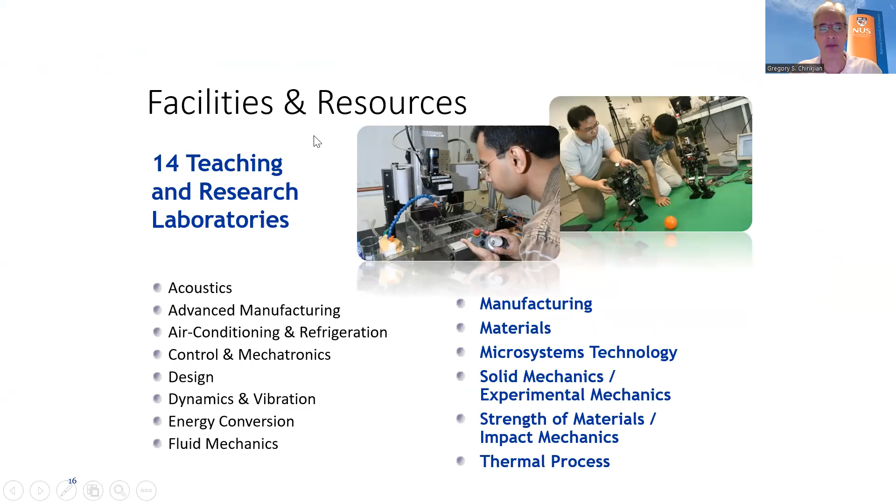Now going back to older work. As Yancy mentioned, I did my PhD at Caltech, finishing in 1992 with Joel Burdick. My topic was what we call hyper-redundant manipulators.

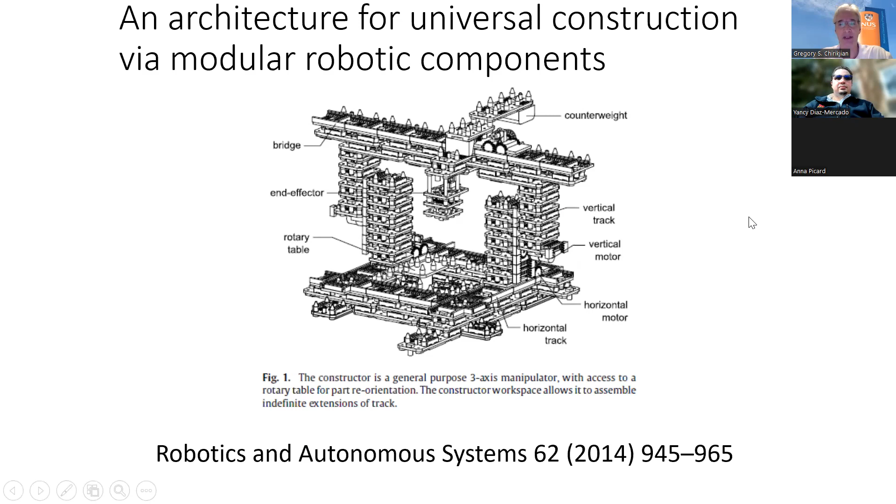Here's a video showing this in action. The idea is if you have a stack of these blocks, this gantry-like robot can go pick and place, and put the parts together. You can actually see it's bolting them into place.

The end effector has a screw fixture which screws onto a part. Each part has screw threads on it. It screws on, picks it up, moves it over, unscrews, and bolts it down. So it's more than just Lego blocks—the structure is bolted together.

You can see that it's forming a second gantry. The first one is moving in one direction, and the replica would move in the other direction. This led to some work on characterizing self-replicating robotic systems.

We came up with a concept called the degree of self-replication. If one is stacking 4 blocks, that is 1 degree of self-replication. If a robot is building a copy of itself out of hundreds of blocks, that's a higher degree of self-replication.

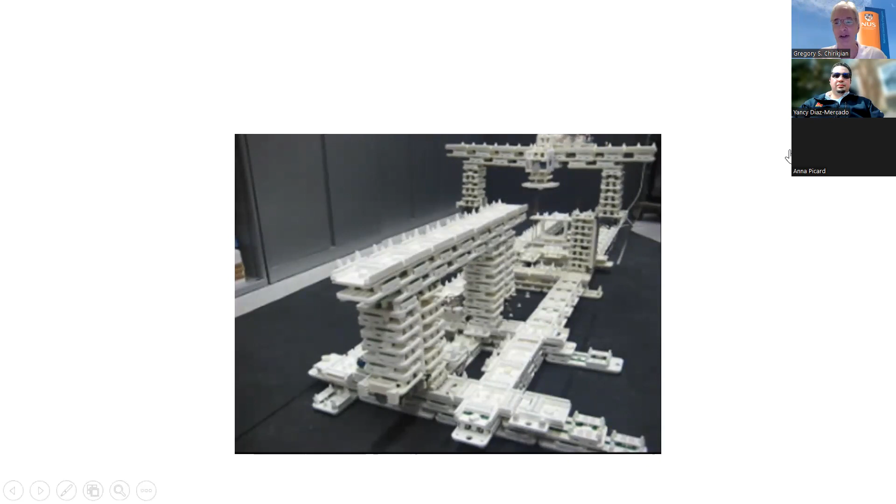So why should anybody care about robotic systems that can build other robotic systems? Well, this concept actually goes back before my time—I was in high school in 1980. The Freitas report from NASA, by Robert Freitas, proposed that on the lunar surface one could develop a self-replicating factory that used in situ resources, reducing the need for launches and building up capacity from a small factory.

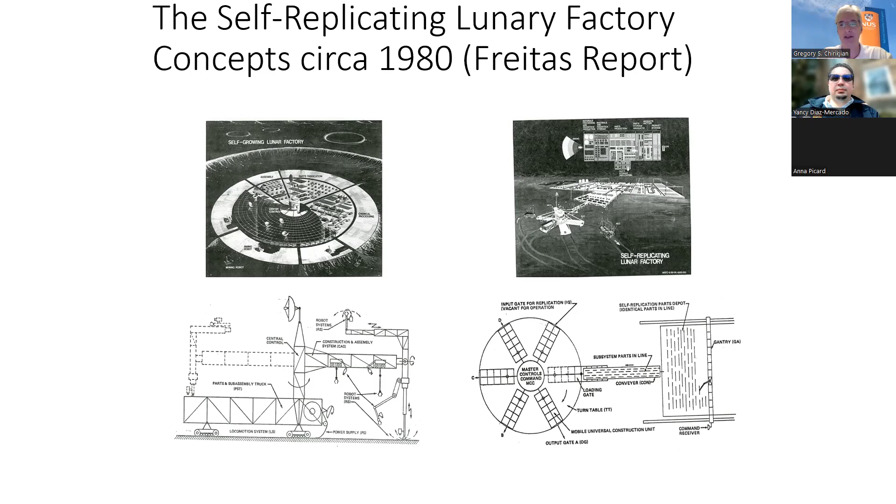At the core of such a small factory would be robots. That report didn't have a lot of technical detail about how the robots could replicate. So about 20 years ago we got into the act and developed what we call an architecture for self-replicating lunar robots, together with Matt, my former student—and actually all these names are my former students—Yu Zhou and Jackrit Suthakorn.

We had this more recent review on robotic self-replication. Not too different from self-replication is the area of team diagnosis and repair. Suppose you have a team or swarm of robots and one of them breaks down. How can the other robots diagnose that and repair the broken robot?

The idea is that each robot in the team is itself modular, and each robot does a little dance every so often while the other robots watch. They formulate, in a Bayesian sense, a hypothesis about the state of the robot. So if the robot's dance is to do a figure 8, there's some variation of what a normal figure 8 maneuver looks like. That's a statistical statement, probability distributions in the pose of the robot evolving in time. If that probability distribution has low variance around the figure 8 pattern, it might be diagnosed as healthy. If it varies widely, characterizing that fault state is what this was all about.

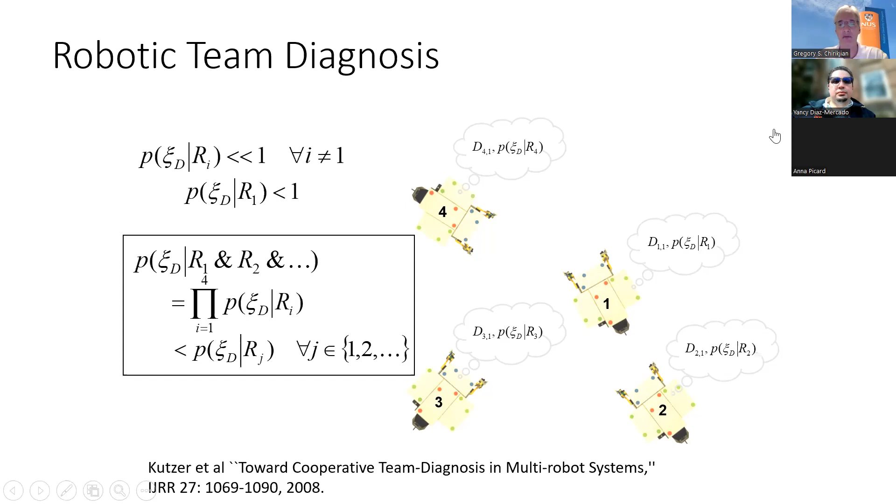Behind a lot of what I've been doing over the last 20 years is a certain kind of mathematics, which electrical engineers should be even more comfortable with than mechanical engineers, in that the idea here is it's a generalization of Fourier analysis. So whether it's image or speech processing or whatnot, Fourier-based methods, FFT, convolution theorem are ubiquitous.

It turns out that the concept of convolution extends not only from translation of a mask, say, for template matching, but if you have a function on a group, such as the group of rigid body motions, or two functions, you can convolve them together. So there's a natural definition of convolution of functions on Lie groups, including SE3, the special Euclidean group of rigid body displacements that we often use in robotics.

There's a concept of convolution, there's a concept of Fourier transform, which takes such convolutions and makes them into a product. In the Lie group setting, if you have a probability distribution, such as in the self-diagnosis work I mentioned, you can define a mean and a covariance and look at how the mean propagates under convolution and how the covariance propagates under convolution. I've used these tools quite extensively, not only in robotics, but in other fields.

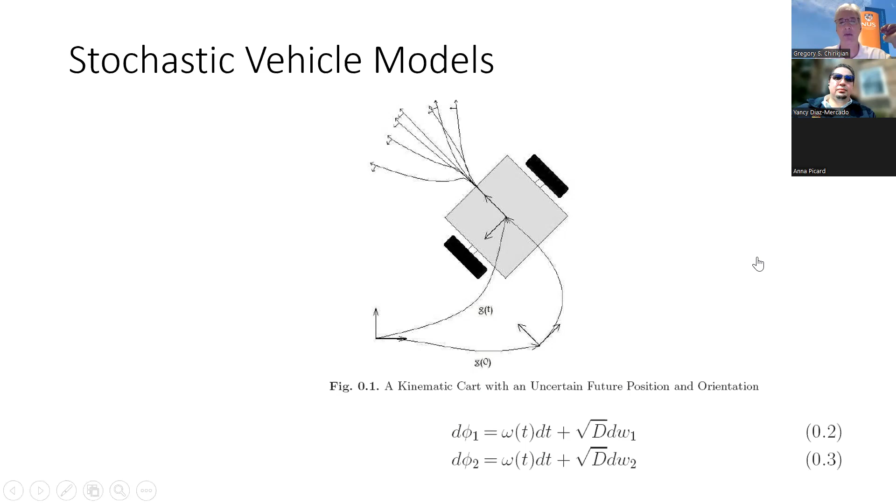I'll give you another example in robotics where these things show up. The Kinematic Cart, the wheelchair-like robot with two independently driven wheels, if you tell it to go straight forward—in other words, you have the wheel velocities both be constant—you'd expect it to go straight forward. But once you add Gaussian white noise to each of the wheel velocities, which could be a model for jitter in the motors or slippage of the wheels, then the trajectories will splay out like in the picture shown here. So we developed a stochastic kinematic model for this kind of cart.

What results, in terms of where the position of the cart is after some period of time, is something called the banana distribution—I didn't name that, it comes from the SLAM literature. On the left here, you see the blue level curves of the banana distribution. You can get that by doing many trials of a stochastic differential equation, or there's a corresponding partial differential equation, a Fokker-Planck equation, which directly propagates the probability density.

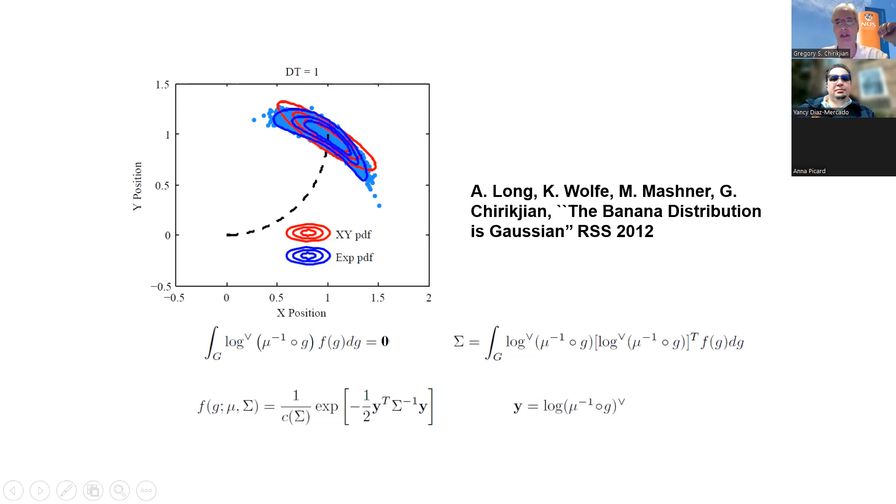So you look at that banana distribution and say, obviously it's not Gaussian because the level curves are not ellipses, but that's in XY-theta coordinates. If instead we use exponential coordinates for this Lie group—the group of rigid body motions of the plane, which describes the position and orientation of the robot—then we showed that this banana distribution is actually Gaussian, but in those exponential coordinates. That comes back to the list of mathematical equations I showed earlier, and the same mathematics applies elsewhere.

I mentioned DNA modeling before. We actually publish in the physical chemistry, biophysics literature. So instead of time being the independent variable of where the kinematic cart goes, if you have DNA subjected to Brownian motion and you capture the shape of the filaments, and if you anchor, say, the base, you get the same splaying of configurations.

Here, it's not trial runs of stochastic differential equations evolving in time, but rather you can think of it as like a bouquet of configurations of DNA. It's actually exactly the same equations as the kinematic cart. For DNA it's in 3D, as it is for kinematic needle steering, another area I've worked in. But in this particular paper, things were 2D because the DNA got adsorbed onto a surface, and our experimental collaborator, Martin Guthold, used an AFM to trace out the DNA shape.

The application here was to determine where along the DNA filament a cisplatin, a chemotherapeutic drug, was binding, because it was the binding of that drug and the bending which inhibits the replication of the DNA, particularly in testicular cancer is where this is used.

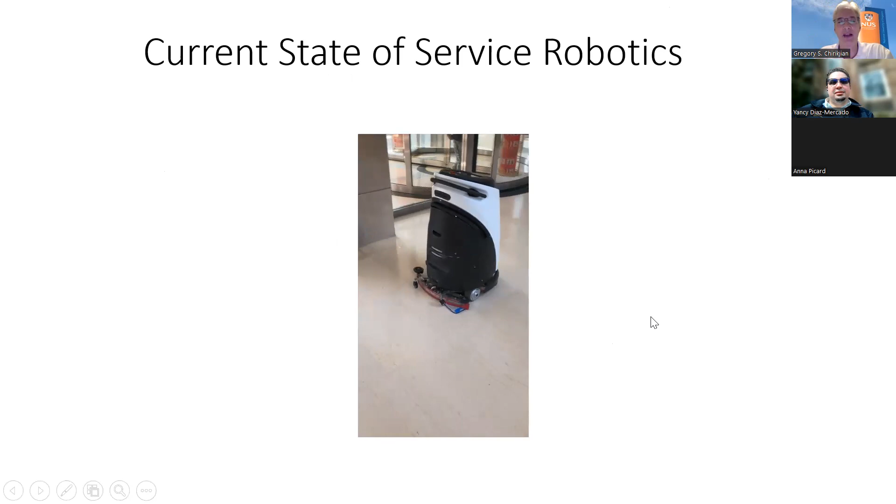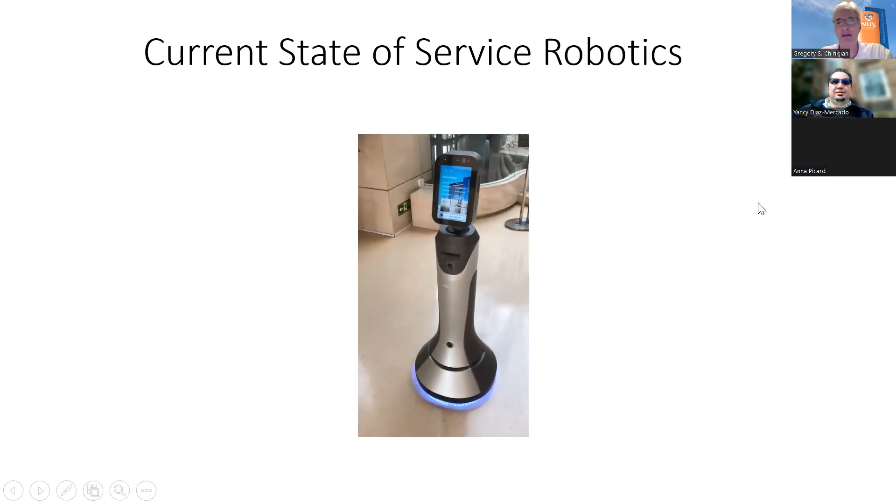So if you look, what is the current state of the art of robots in the service environment? Well, you have things like robots cleaning floors, and this is a robot greeting people at the lobby of this hotel. This happened to be a hotel in China before the pandemic, but they're not very smart.

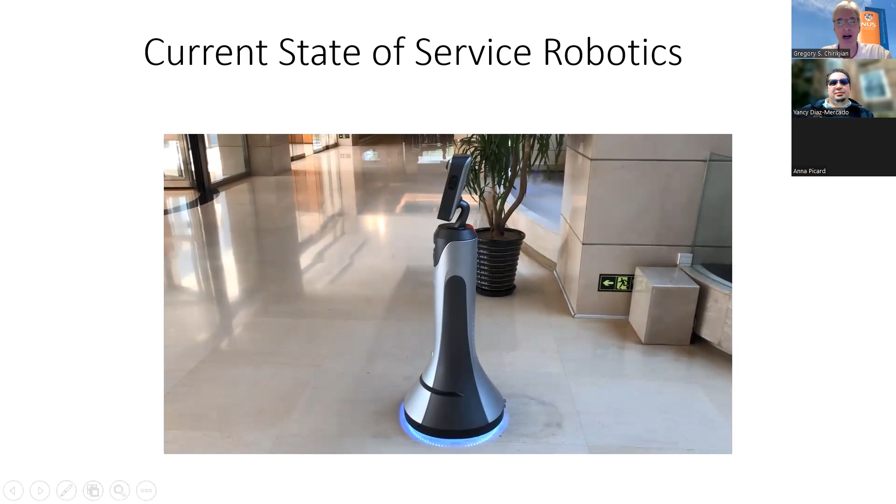I just waited to watch this happen. Obviously, they have no grounding, no sense of proprioception of self or whatever. And so they just sort of bang into each other. And so what we want to do is endow robots with a higher level of intelligence.

And the application is elder care, especially in East Asia, whether it's Japan, Korea, Singapore, China. The aging population means that this sort of Jetsons style robot may become popular in the future.

But if you're going to have robots interacting with people, they need to have a much higher level of intelligence than what they have now. So of course there's related work on object affordances, affordance-based reasoning, and this is an incomplete list. It goes back to J.J. Gibson, a psychologist, in the way humans perceive objects and how they're used. Ruzena Bajcsy, when she was at UPenn, and she's back at UPenn now as an emerita professor, worked on active perception, as well as Yiannis and other people.

But on the affordance side, as I mentioned, folks at Maryland have been working on affordances, and folks in Europe, but there's not a lot out there, I would say, in the US, more broadly speaking. I think it's picking up.

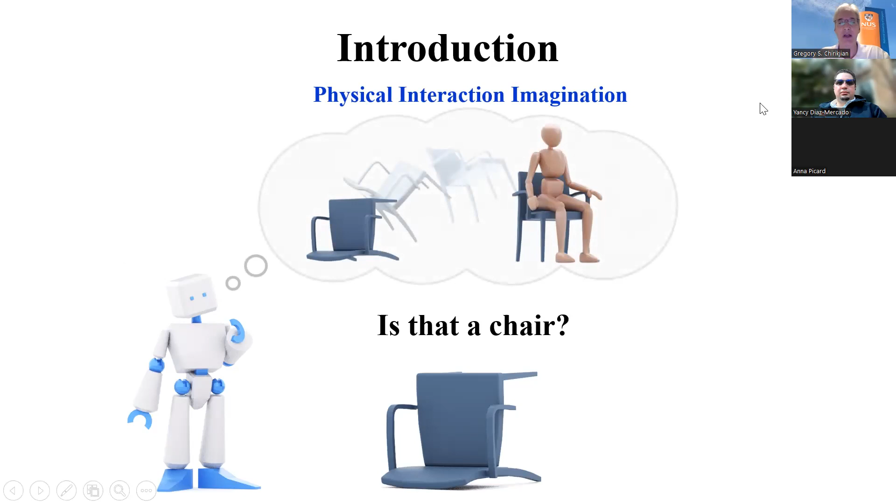But if the chair is rotated, then it will afford the sitting function. So the idea is that the robot will go, it will scan the environment, it will classify whether the chair

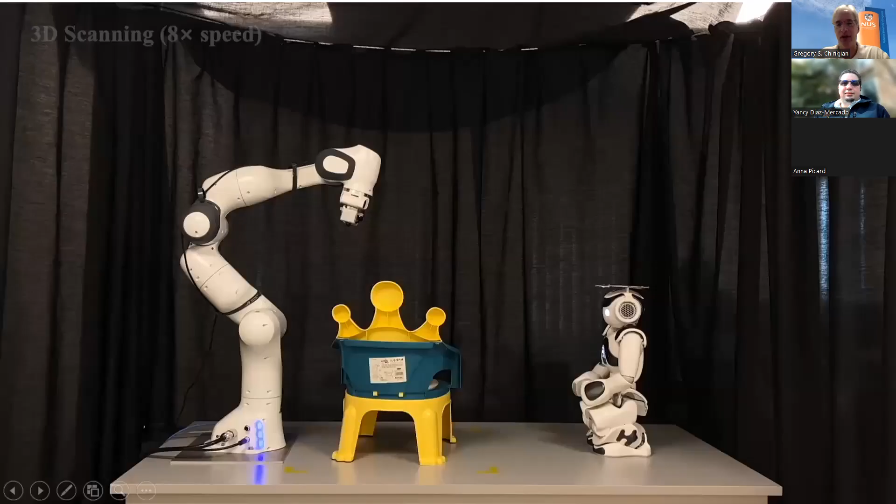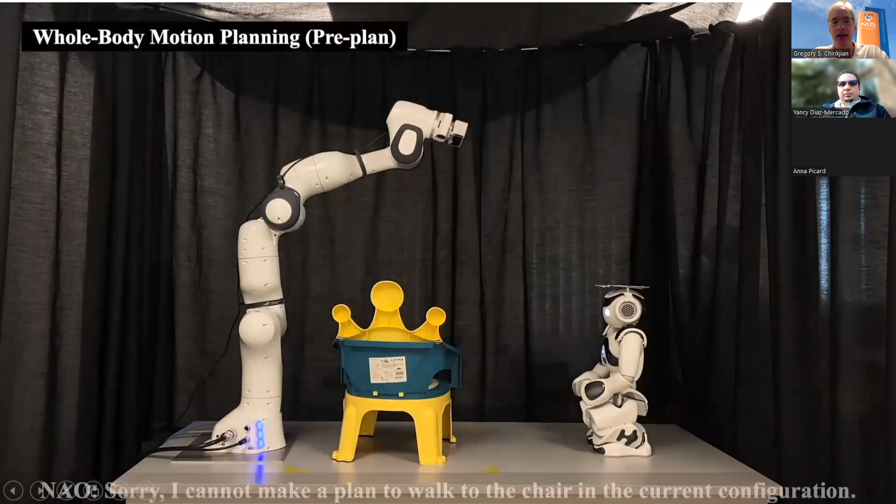So here we see this Franka robot on the left is doing the scan of the chair. Then we put the scan into this imagination framework. We find this is the best way to sit. And then the NAO's job is to place a teddy bear on the chair. That's put the bear on the chair, okay?

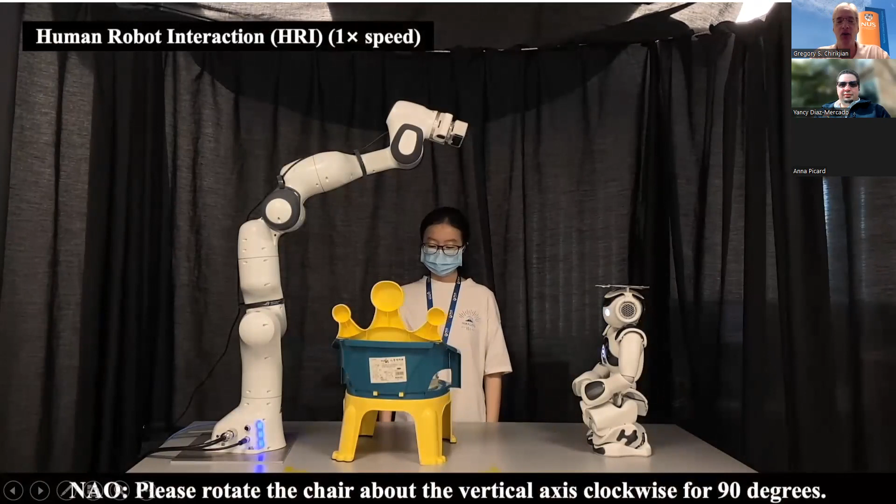And so the chair at this orientation, the robot is saying it cannot reach it, and it asks the human to rotate the chair.

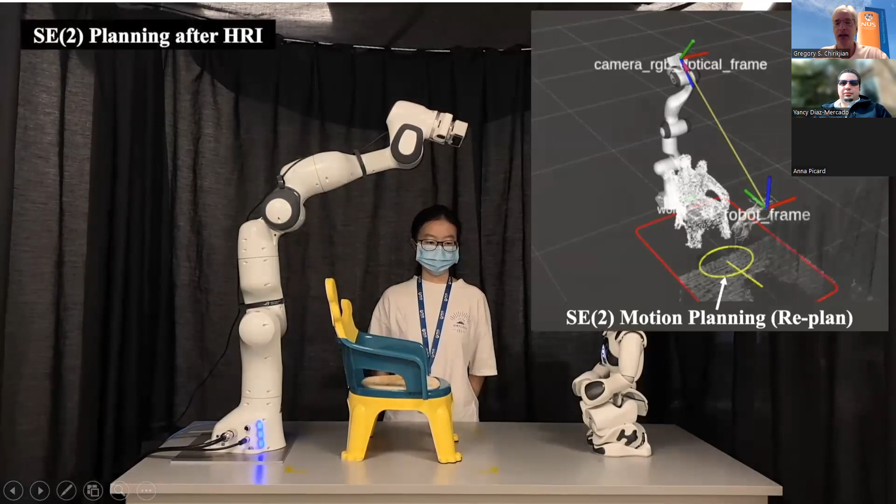And because we do quite a lot of motion planning in my group, we've developed a motion planning framework, which we're using in this context. And I mean, it doesn't look like a very impressive thing for the robot to walk straight

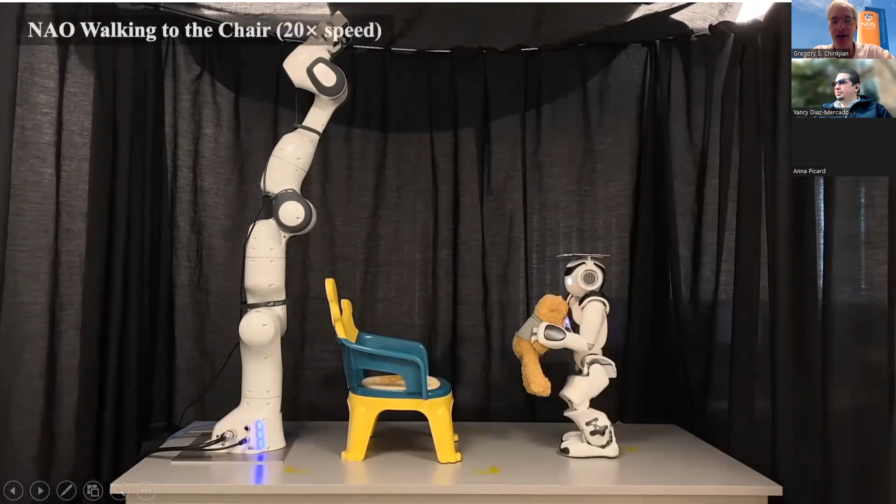forward, but it includes an articulated model of the teddy bear. It includes the robot imagination of the chair. This is a previously unseen chair, not modeled. There's no knowledge of the shape of the chair in advance. And it's all done, it's not real time, it's relatively slow, but it's all done, you could say, on the fly without prior knowledge, okay?

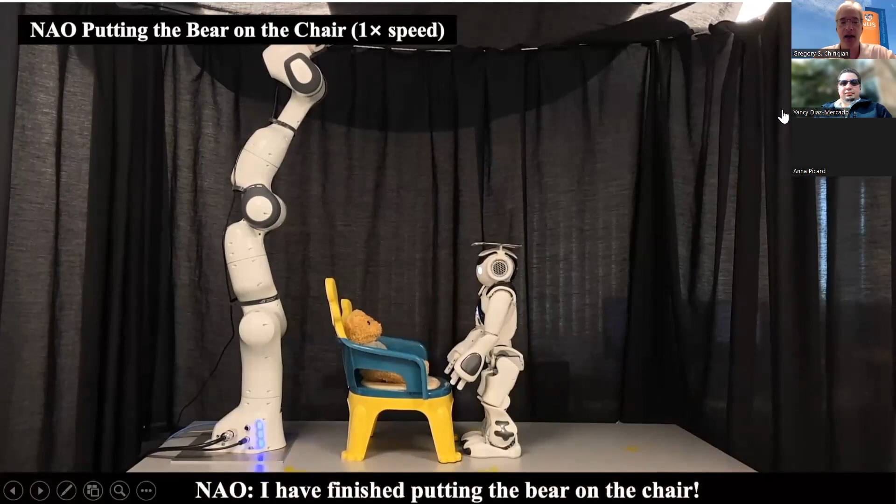And so this was one aspect. Yeah, so, and it works with multiple different kinds of chairs, okay? Now, so we've done, you know, maybe 50 different chairs, and it works consistently.

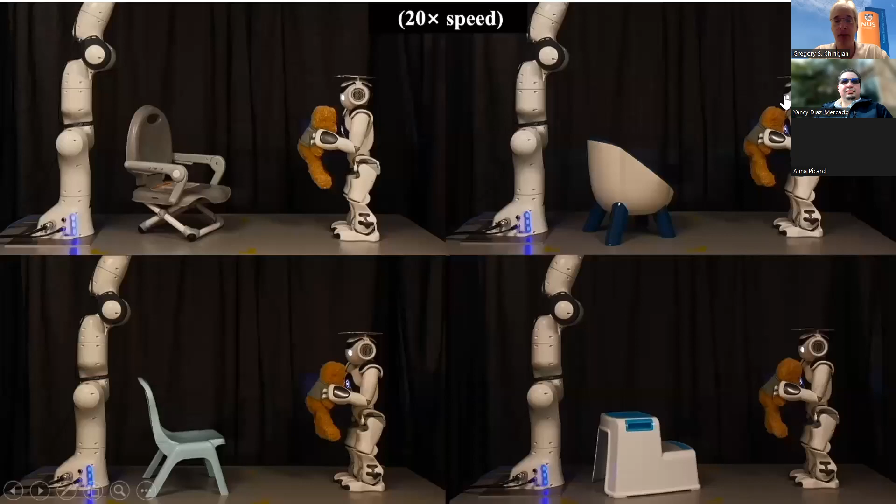And we've done it with things that are actually not chairs, but afford the sitting functionality. Like in the lower right here, it's not really a chair, it's really a step ladder.

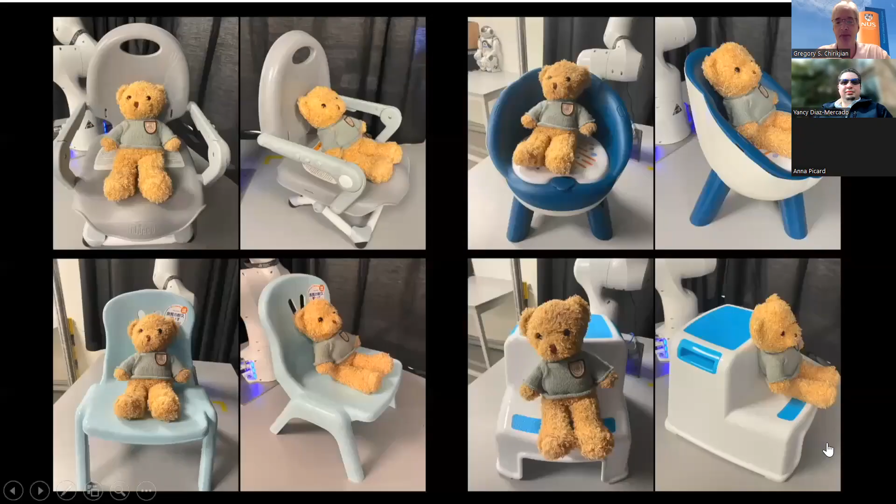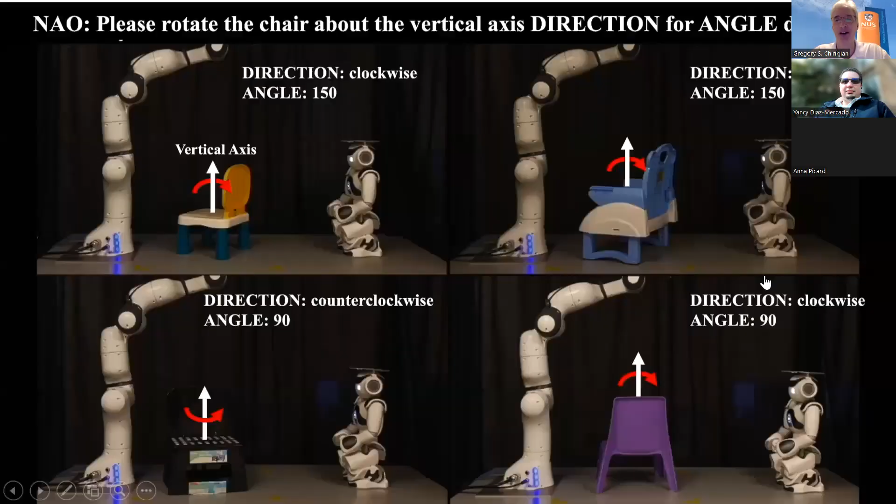And we've done it with other things also, like there'll be coming up an example where we constructed a chair out of copies of my books, which, you know, deep learning might characterize as a bookshelf or something, but this recognizes the affordance of sitting for the bear.

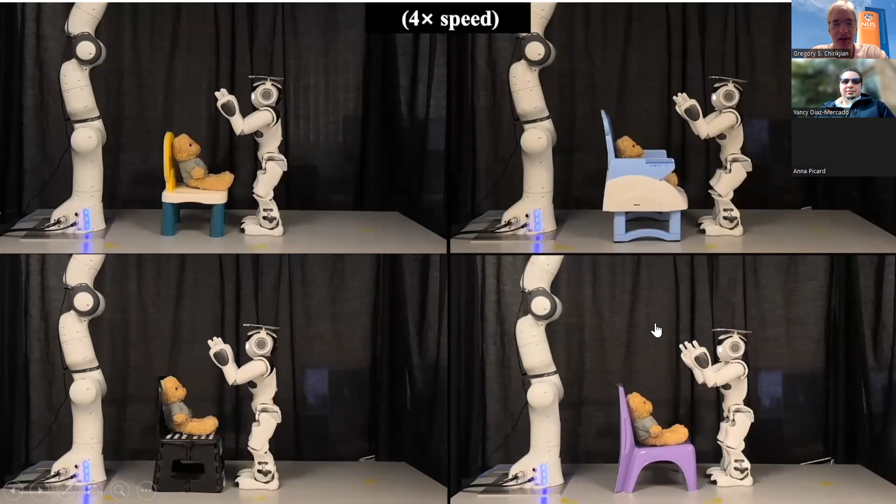Now there's an aspect of the human robot interaction in this, which is that the human is being asked to reorient the chair so that it can be reached.

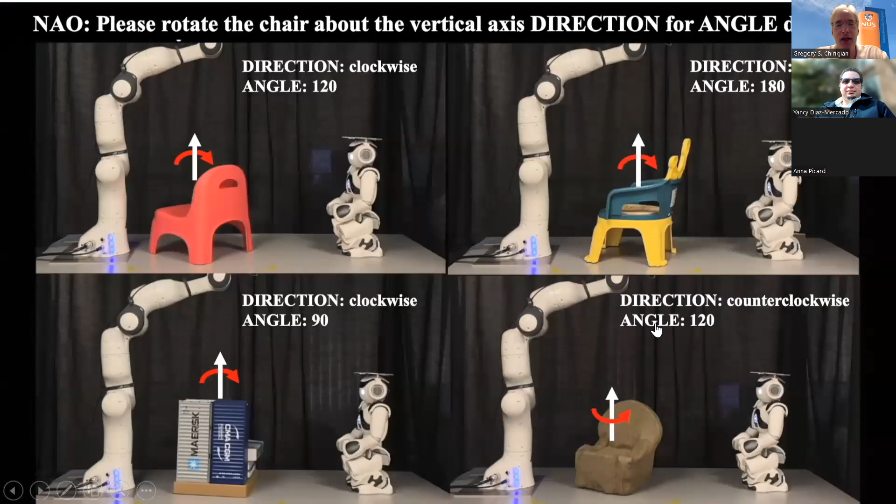And so then we said, well, what if the human is naughty and rotates it the wrong way? And so, you know, the human rotates it. On the lower left, you can see the makeshift chair, which it recognizes as affording sitting.

The robot recognizes, okay, I can't reach there. You didn't follow my instructions. Please turn it the other way. This is the case when the human doesn't obey the initial instructions.

Let's move on here. Okay, so the next work is what we call prepare the chair for the bear.

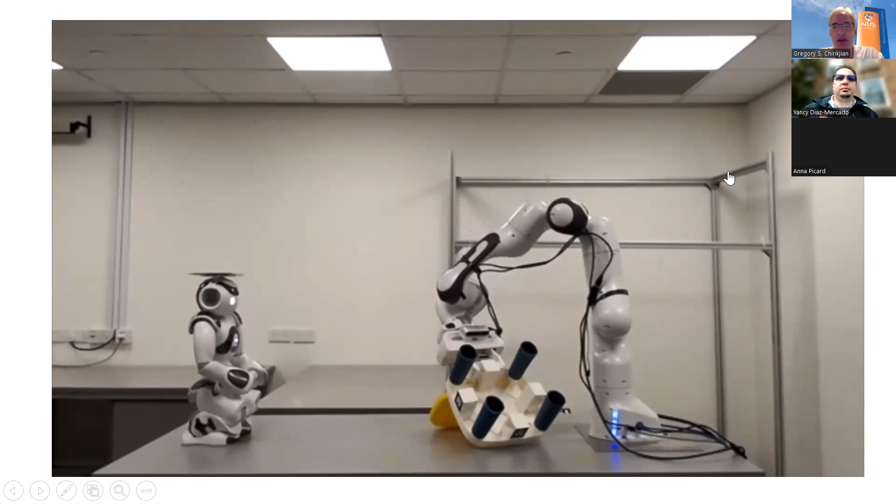And that's when the chair initially is not upright in its functional pose. So here again it's the same methodology: we do a scan with a 3D camera. This chair has handles attached so that the parallel jaw gripper can reorient it. We're not focusing on manipulation here with multi-fingered hands, so we're taking that problem out by putting these handles on things that we want to manipulate.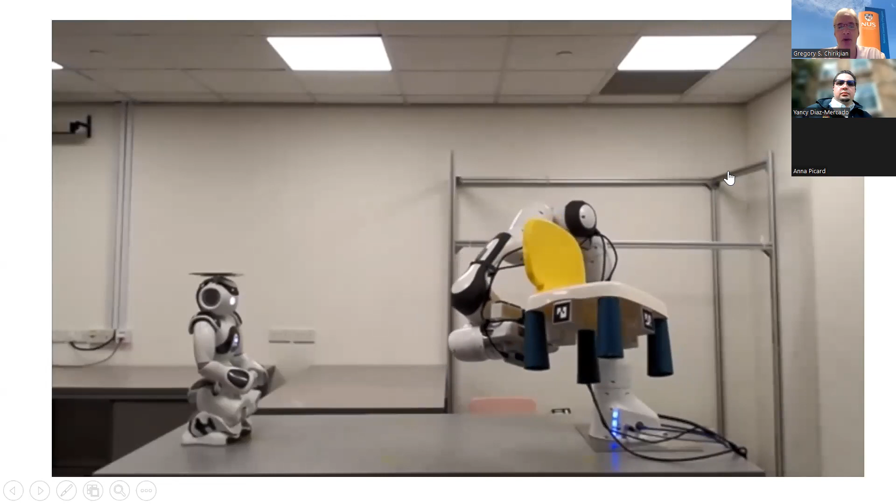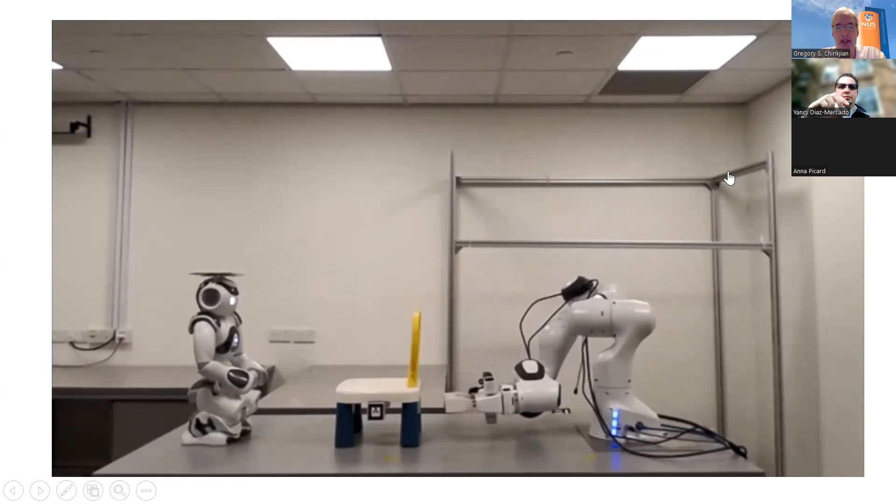It's scanned, and then it's scanning the top here, and then it puts it in the imagination framework, the simulation environment, and then just like before, to know what is the orientation to be used as a chair, and how can the robot reach it. So it puts it at the right orientation now to deliver the teddy bear.

So this was prepare the chair for the bear. Of course, the robot is just taking a few steps forward and putting it down. We have the capability for the robot to go through an obstacle field and put the teddy bear on the chair, but that's not the main point we want to make. The point is the pipeline and the architecture for imagination.

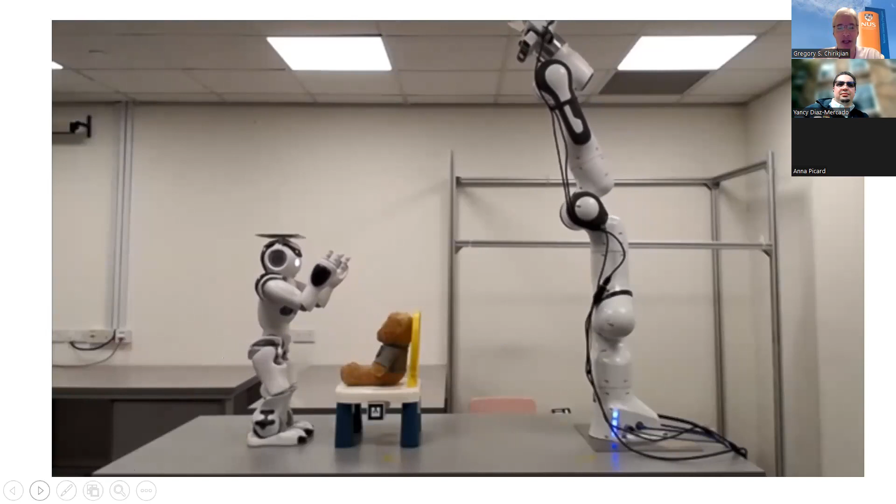Okay, so related to this is the work that I mentioned that we presented at IROS 2021. My student Hongtao Wu has been leading many of these efforts. And this is, can I pour into it? Okay, so basically this is to determine if something is an open container, such as a cup. Here's a teaser of how this works.

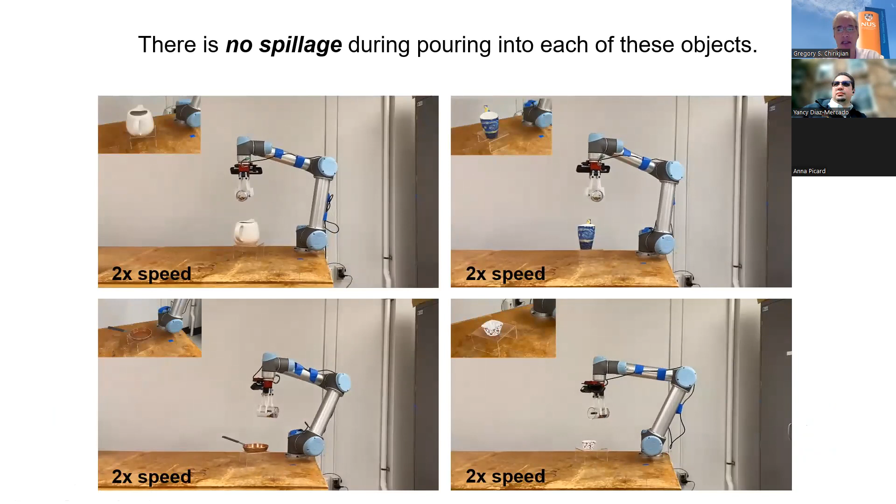So all of these objects, there's a plexiglass stand there. All of these objects are previously unseen. They were scanned, and then the robot assesses them as something that you can pour into.

The container which initially contains the M&Ms is known in advance, but what is not known is the container that's receiving the M&Ms. There's a lot of work out there on simulation of liquids and pouring, but usually it's for previously known objects. There are deep learning based things like Affordance-Net, where there are many instances of previous containers and other objects that have been annotated and whatnot, but here we're focusing on a priori unseen objects.

So the idea is, can the robot imagine open containability using a framework similar to what I showed for the chair? And so the essence of an open container is, can you pour something into it and retain what you've poured rather than having it spill out?

So here is an example, a couple of examples. The robot scans again, puts the scan in the physics-based simulation. And here we drop a sheet of beads and ask, how do beads get retained in the object? And if it's a roll of tape with a hole in the bottom, then the beads will pass through. So it might look like a cup, but it doesn't afford containability. And then the object up here, it's a paper cup of some kind, does afford containability.

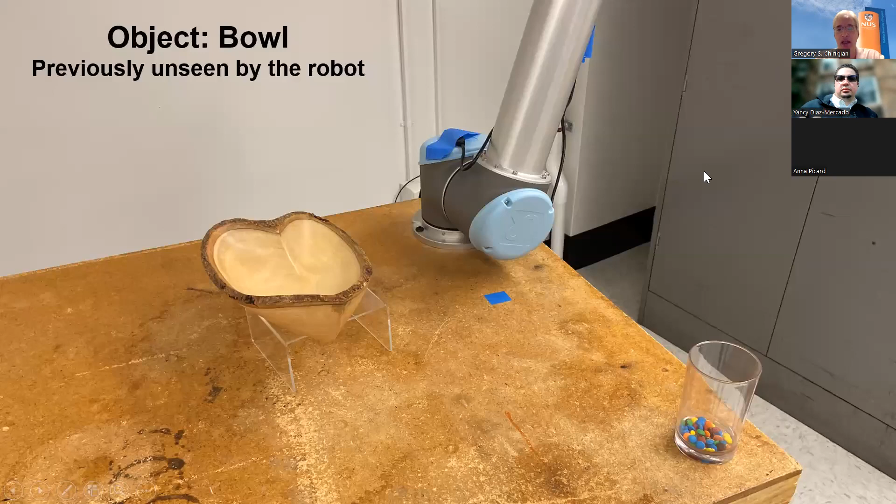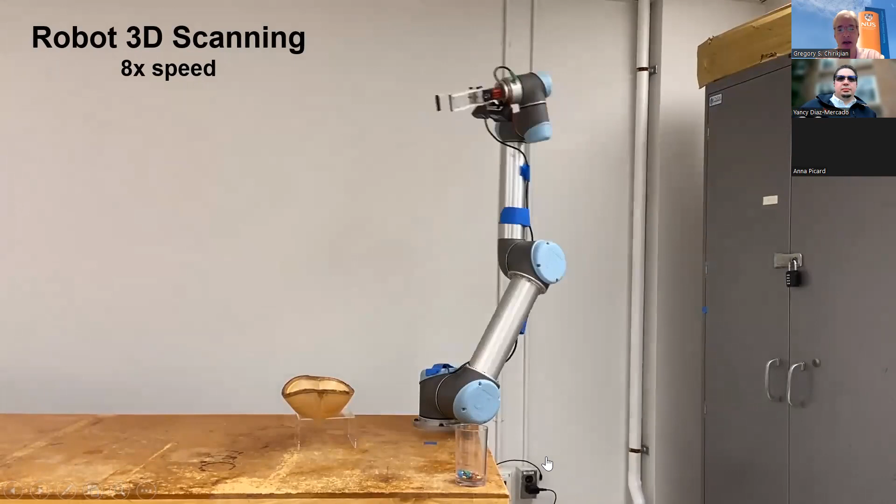So that's how the framework works, and it consistently works as well. This sort of half coconut looking thing is scanned. It had never been seen before. Then in imagination, it is shown to afford containability. And so then the robot goes and pours into it.

So here's the imagination. We get a footprint of the beads that get retained inside the object from that, and then we accelerate and tilt the object a little bit to see if it stably contains the beads. From the footprint, we get information about not only how many beads go in, but where we should pour. So we choose the center of mass of the footprint to be the place where we pour. Then there are simulations of what angle of pouring and which direction to pour from. So it's all simulated to give foresight of action before the robot commits in the real world.

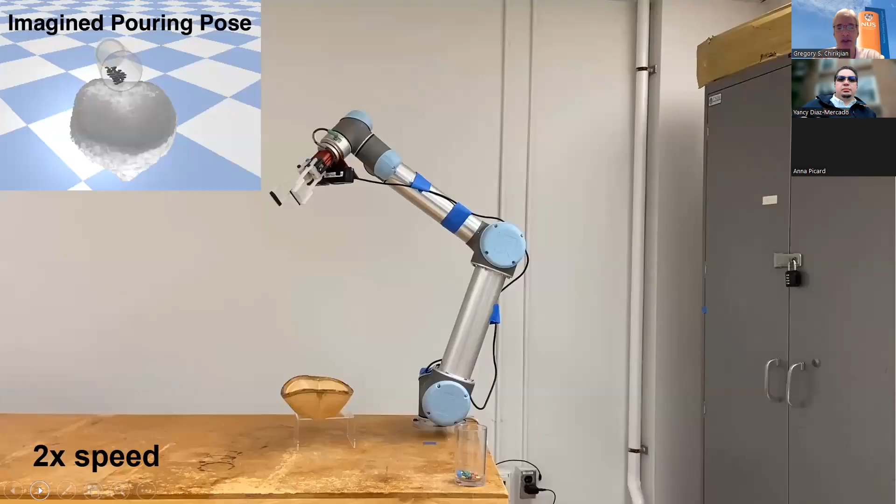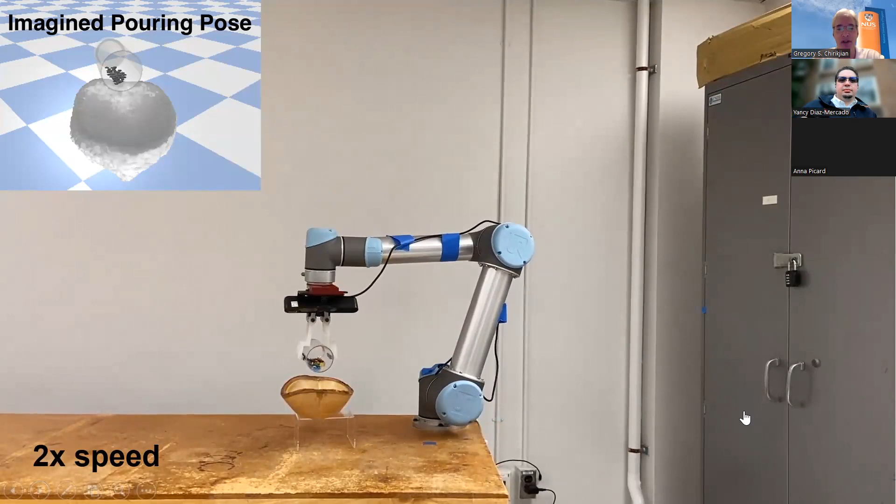So that's why that's imagination, right? You imagine what might happen if you do this or that before taking action. Imagination, foresight, these are things that we're very interested in. So then after it's done this scanning and imagination, the robot just goes and pours the beads into the real container.

We've demonstrated this on 100 different containers, and it works very consistently, some 98% of the time. Now, that doesn't mean it works every time, and I'll show an example, but we did a comparison with many different objects, both container and non-container, and it could very well categorize whether the object was a container or not. You can look at numbers of how well it's done.

Let me go back here. Okay, so, oops, sorry.

So here you see the beads dropping down on different things, seeing which can contain and which cannot, and it works very, very consistently in terms of categorization. Then after categorizing, there's the actual pouring, and that also works very, very well. We've done many examples, 98% success.

One case where it didn't work is coming up. Actually, in all of these cases it works, even this candlestick holder, which, would a human call that a container or not? But the moat around the side affords the beads more than the hole in the middle. It got that from the simulation.

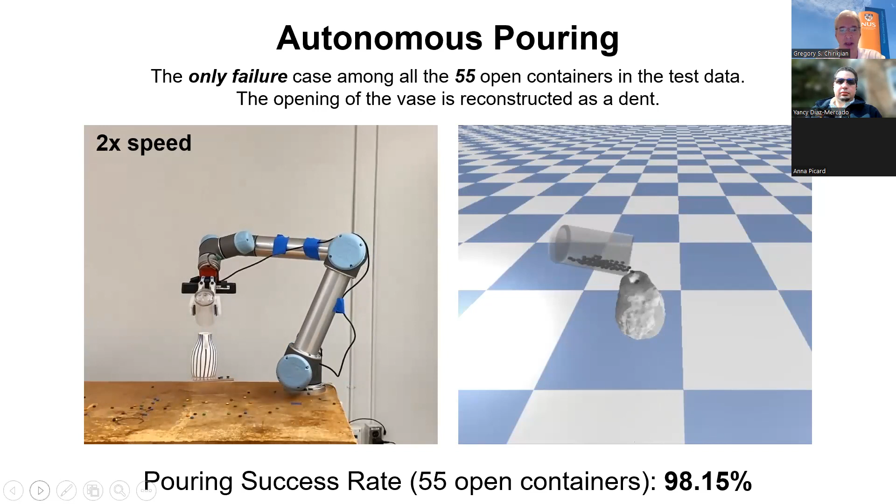But here's one example where it failed, where the neck of this vase was too narrow. It characterized it as an open container, but when it went to actually do the pouring, it failed. Well, 98% is not too bad.

I've basically shown in this talk two examples, the chair example and the open container example. But we're developing this dictionary to have initially 25 different object categories in the home, and we're open sourcing it, so that robots worldwide can reason about previously unseen objects, and not only reason about them, but then go and manipulate them in the real world using this combination of sensing, active vision, as well as robot imagination, physics-based simulation of affordances of object categories, rather than specific instances of objects or big data-based approaches.

Which is not to say that things can't be blended. There are certainly cases where using learning makes a lot of sense, and it might even be that learning is trained on the physics-based simulation rather than simulating everything every time. But this is just to demonstrate the framework of how simulation can be used in the context of previously unseen objects.